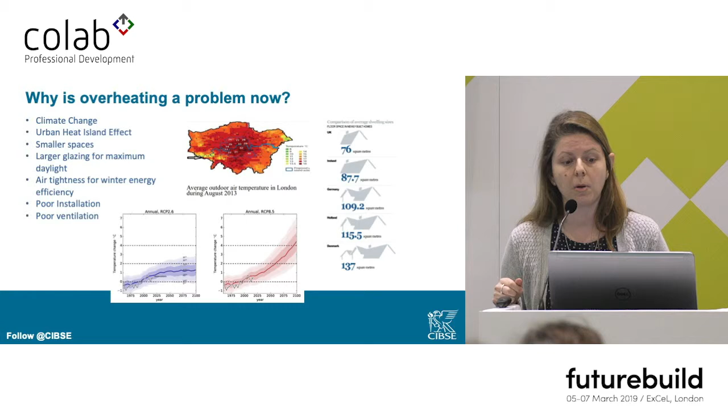We create a lot of airtight environments, again, for winter energy efficiency, and potentially problems with installation and ventilation just exacerbate the problem of overheating. Homes are particularly vulnerable because most of our homes are reliant on passive measures to deal with overheating. And perhaps traditional architecture was a bit more robust in that sense, but we have been designing more glass, more,

I see some people laughing. I don't know if you are identifying the buildings that you have designed.

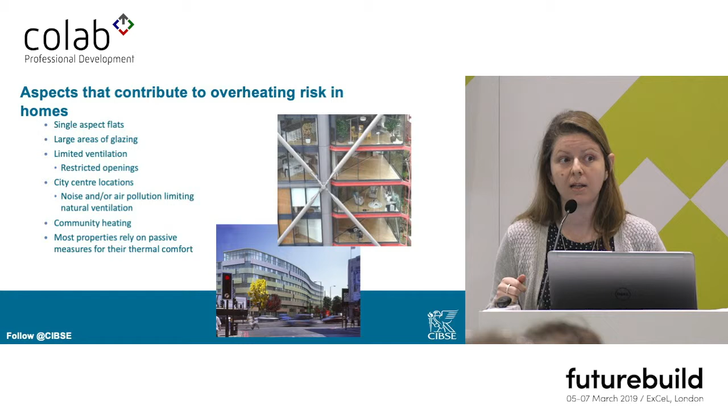Yeah, so people love the views and the glass and all that, but there is little understanding of how that impacts the summer performance of the buildings. We rely again a lot on ventilation, but when you're designing these kinds of buildings within an urban environment, the noise and pollution might mean that you won't be able to rely on that natural ventilation.

So overheating, there has been a lot of debate. What is overheating? How do we define it? Endless discussions. Because everybody experiences overheating in a different way, based on physiology, psychology, environment, control over their environment. We know for sure that temperatures above 35 degrees mean that your body starts having problems. You are at risk of heat stress. And there is limited research that shows that during nighttime, if it's above 26 degrees, then you might have problems sleeping as well.

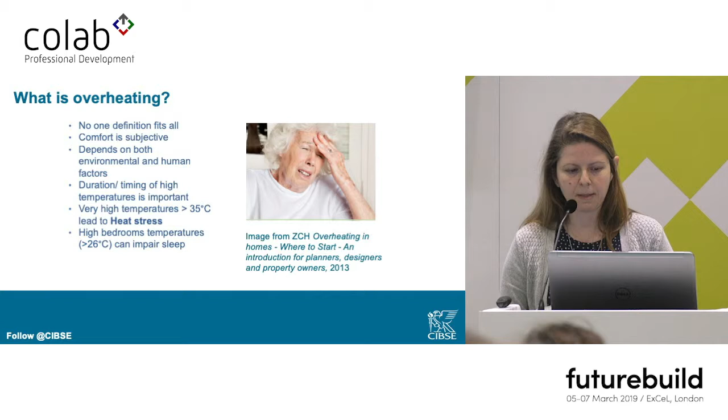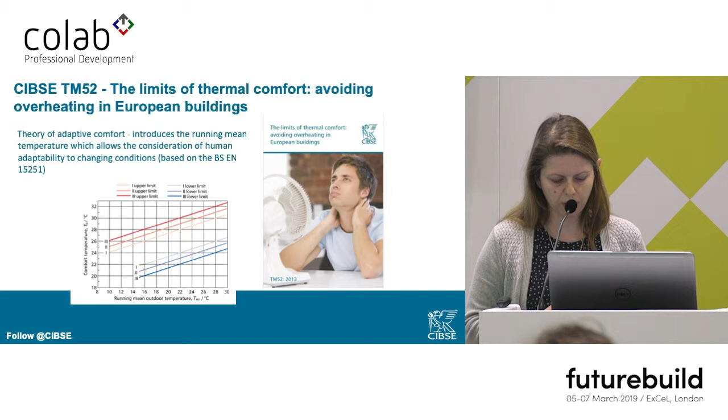So some of us, also in the room, tried to create, based on this adaptive comfort, a design protocol to be used in homes. So we used the first criterion of the adaptive comfort, the TM52 methodology, and we also incorporated the 26 degrees for sleep impairment during the night.

Now the basic use of this protocol is to give you a baseline, so everybody uses the same assumptions when they are simulating and designing a property. And then you have this baseline, let's call it the worst case scenario, and you add on top of it your mitigation options, and then you have a good understanding that you can communicate with your client on how these mitigation options are very, very crucial in your design solution.

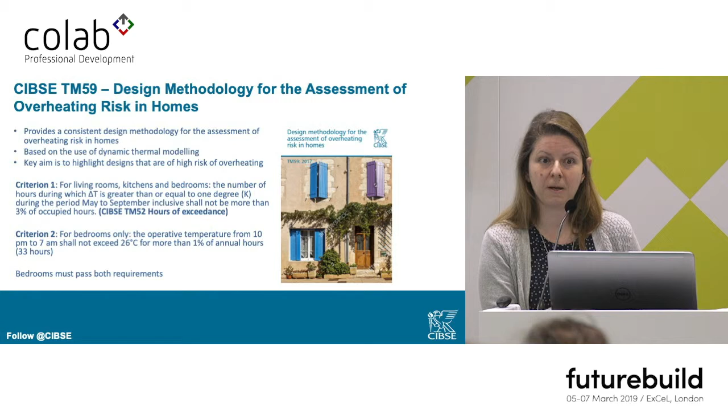One of those really critical, we felt, aspects is occupancy. So previously, based on the assumptions you made about occupancy, for example, you could assume that people would be out during the day. That could mask a lot of the risk of overheating. So we felt that it was really important to include a 24-hour occupancy, because people actually live and work in their homes during the day. Young mothers with their kids, older people, it doesn't mean that they're going to leave their homes just because we said so.

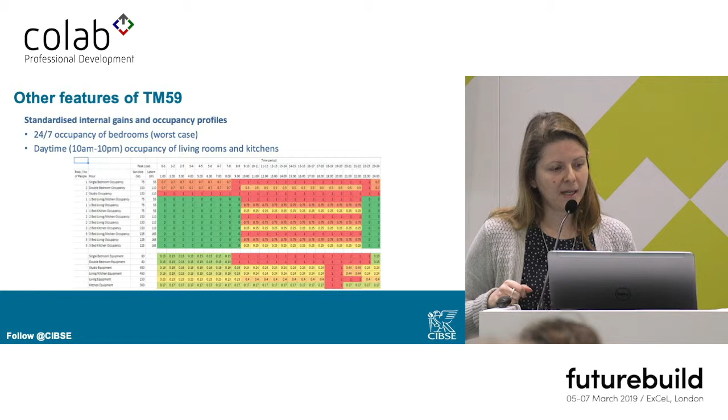The other fundamental aspect that we included in the methodology is the use of future scenarios rather than observed weather patterns. So we thought, instead of using an observed last 30-year climate or weather profile, we introduced the use of the 2020s, which is a 2010 to 2039 weather pattern. That gives you an understanding of how climate is at the moment, the weather you're designing at the moment, but also an indication of how things might get a bit warmer in the future.

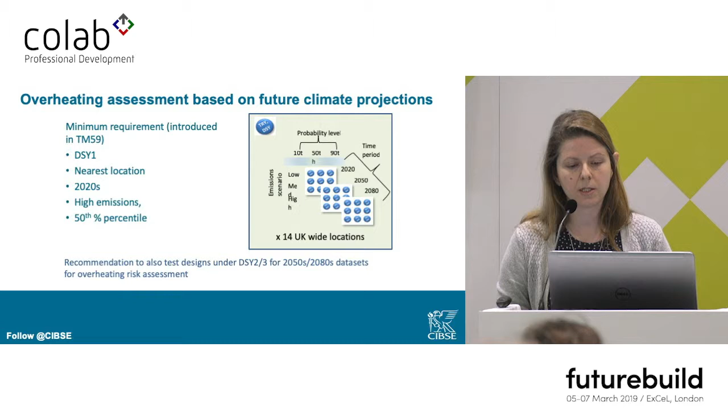And the little graph shows you what is available. As a designer, you can use different scenarios, different probabilities, different future timelines for 14 UK locations to assess the vulnerability of your designs to climate change.

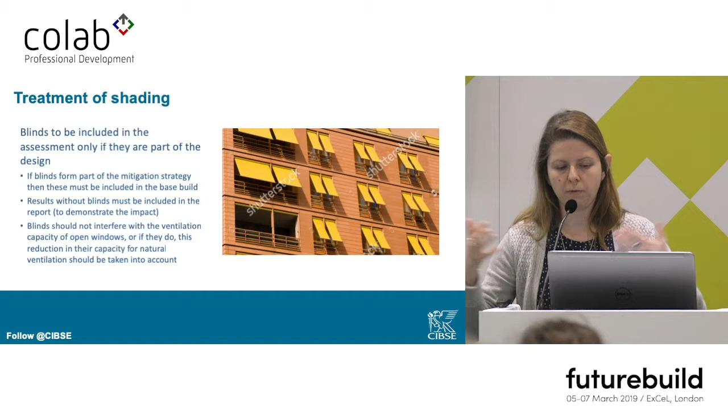Also very, very important is when you are actually introducing a mitigation option to make sure everybody in the design team understands that this is crucial in terms of dealing with overheating. It's not optional to have shading if that is part of your mitigation, of your design solution. Opening windows, it's good to assume that people will open windows, but there are various aspects, security, noise pollution, that actually will mean that people won't be able to open the windows. So as the previous speakers mentioned, this needs to be incorporated into the design.

Having vulnerable residents gives you the responsibility of looking at their vulnerability, the specific impact of hotter events on their physiology. And something that has been raised quite a lot recently is in blocks of flats you have the community heating pipes that are circulating hot water during the summer as well. That heat is trapped in the communal corridors if there isn't sufficient ventilation, which means it goes into the flats and reduces the capacity to cool.

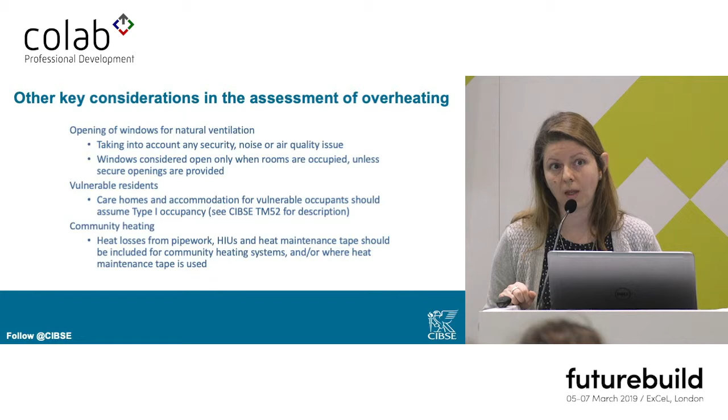This is very, very quickly some tools that we also have available to try to represent what future climate projections are telling us, and this is available for 14 locations. It tells you the likelihood of certain changes in temperature happening in the 2020s, 50s, and 80s. It gives you that change for the low, medium, and high emission scenario. You can do comparisons between the scenarios. In the 2020s, it tells you that there isn't really much difference between the emission scenarios, but as you go into the future, there's actually going to be a big difference if we adopt a low emission future or high emission future.

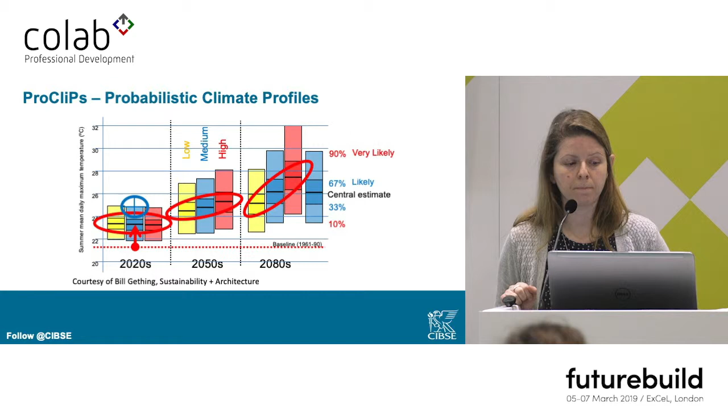We have a couple more publications that might be useful. This one is case studies. So it's actually live buildings that have been designed based on the idea of adapting to climate change and looking at overheating now and in the future. And they found it very useful to discuss with clients the idea of phased adaptation. So perhaps now it's not a problem, but in the 50s it might become more of a problem. So you allow for certain solutions to be incorporated in the future rather than install and design for it now. It's very practical guidance. All of that is free, by the way, to everybody. So you can just go onto the CIBSE website and download it.

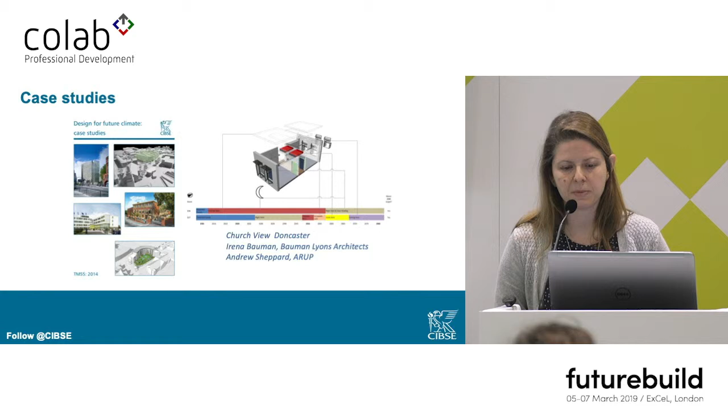And the final slide is for those that are overkeen, who want to know more about overheating. There's quite a lot of research that is out there for everybody to download and read. A lot on homes, but also hospitals, offices, now and in the future, how it's going to affect energy demand, our health. There's so much out there. If you're interested, just Google it.